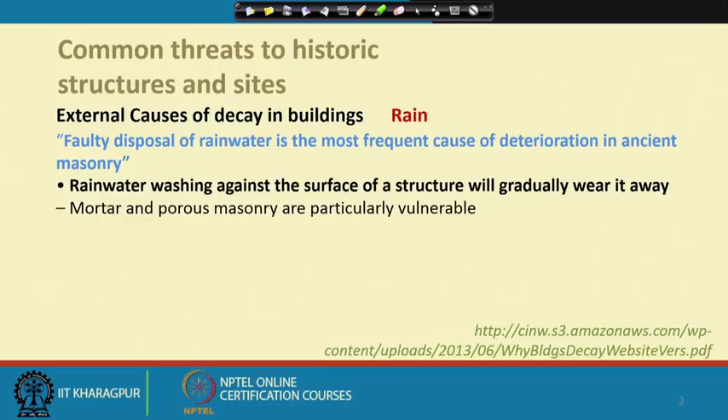If you remember, we said the faulty disposal of rainwater is the most frequent cause of deterioration. It can wash against surfaces, especially porous building materials like brick and certain kinds of stone, and that is a problem. Rainwater penetration into individual materials of the structure causes more damage. I mentioned salt crystallization, continual wetting and drying, and the action of frost and ice.

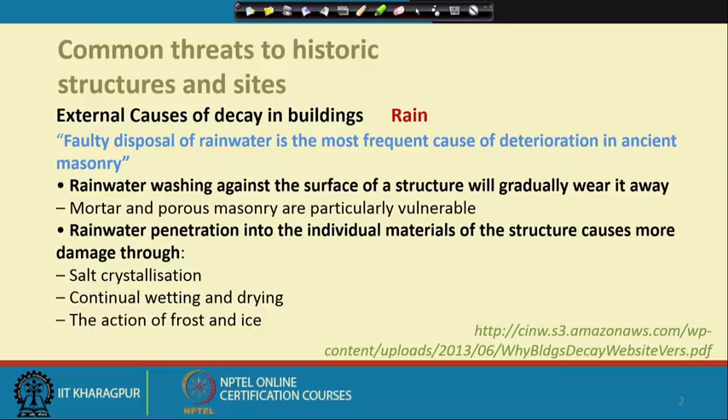We will discuss these three independently to understand what these issues actually are. As I said, it is not only one aspect or factor which causes the problem; there are many other things combined which cause these basic issues.

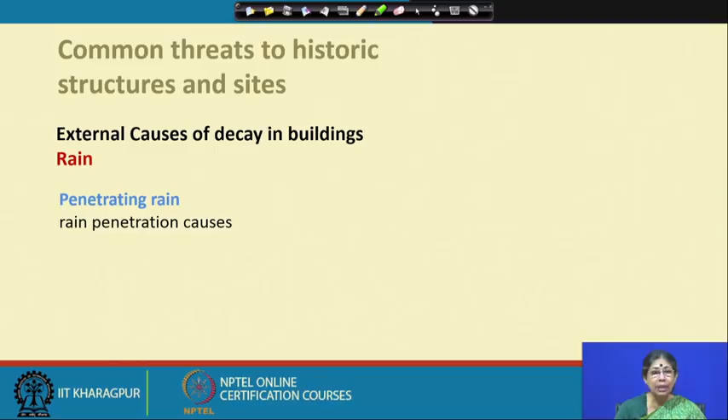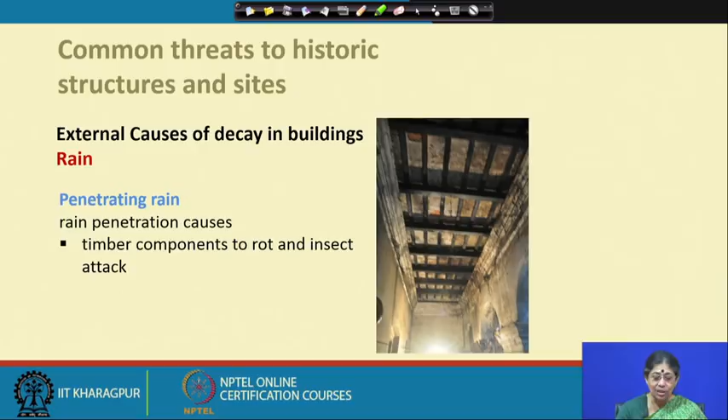Now let us see the external causes of decay: penetrating rain. Rain penetration causes timber components to rot and attracts insect attack. As you can see, this is again in Narajol, a place where roof damage has happened - the flat tiles, timber posts, beams, and rafters. Because of water penetration through the roof, these timber elements are not only rotting but this also creates a very good environment for different types of insects to attack.

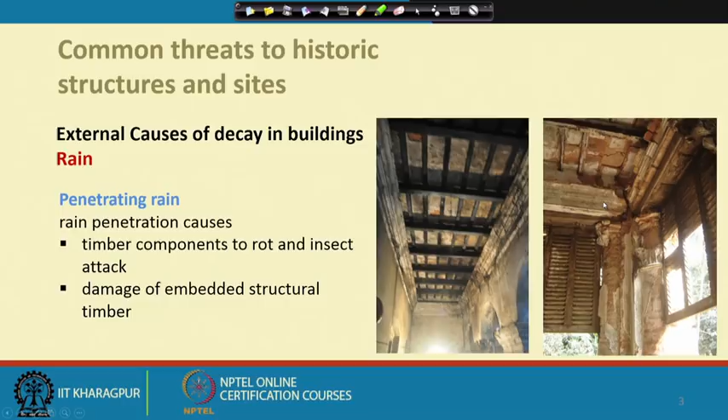This is also Narajol, one of the roofs there. You can see what type of damage has been happening - the timber beams and other elements show major problems, because where the timber beams are resting within the masonry, these places get affected due to water penetration and the rotting of timber, which ultimately causes a structural problem to the entire structure, and the roof may collapse due to damage of the embedded structural timber. These things happen one after another, as subsequent events, and if not taken care of from the beginning, it can become very severe.

The external cause is rain and moisture - rain, humidity, and other factors cause damage not only to structural elements but also to the interior.

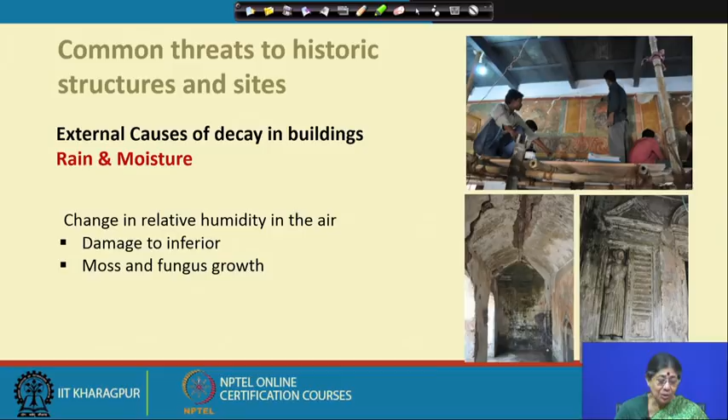So these are some of the issues which happen due to accumulating rain or rising humidity. The other problem, related especially to cool climates, is the action of frost, snow and ice. As you know, in many places this causes severe damage. Even though India is a vast country, there are areas with a very high degree of snow accumulation.

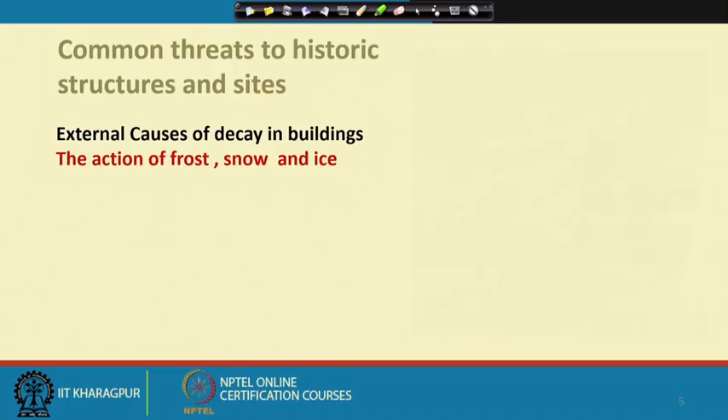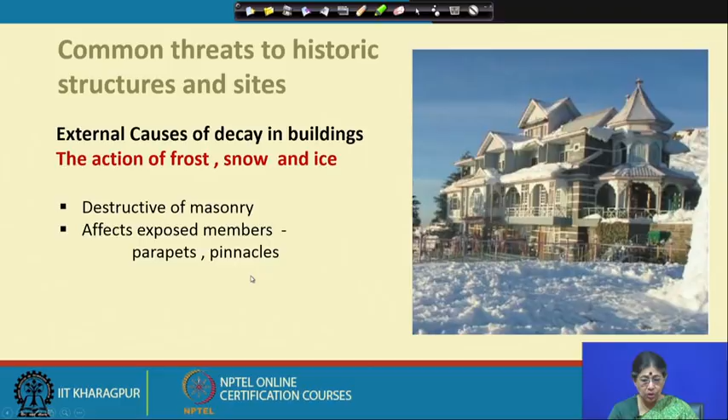It also affects the members of the parapet and pinnacles. As you can see, all of these are a problem. The heavy sheets of snow can cause a problem, and there is a possibility of the roof structure collapsing under heavy load. This is in addition to water seepage and other issues, like moisture penetration.

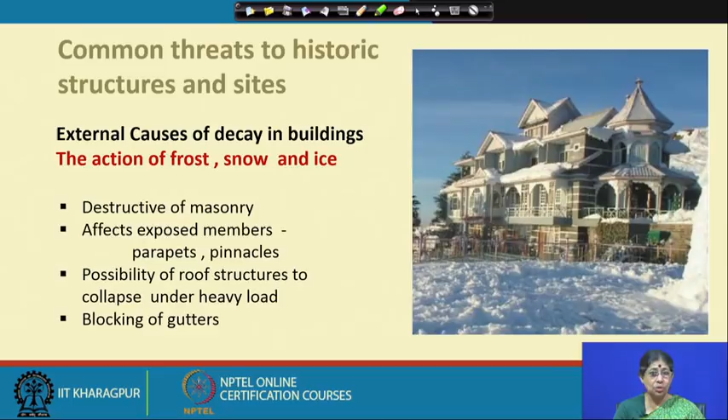And of course, the flow of the water: all the gutters and pipes can get blocked due to the snow and the drop in temperature. This has to be taken care of there. The blocking of the gutters is a very severe thing. So, depending on the climate, the likelihood of some things happening, and the material, one has to understand what the likely causes of decay are in a particular scenario.

Now, I also mentioned salt crystallization. Then there is groundwater. Groundwater problems can happen because of the accumulation of water or a high groundwater level, and the groundwater may contain salt; either the salt comes with the groundwater or the salt may be in the building. Some bricks, because of their material, can have a high accumulation of salt. So, salt crystallization is one of the major problems of

porous building materials. You can see this is North Bengal, where salt crystallization has happened, and you can clearly see the marks where the salt is coming out, and here you can see the spalling of the plaster because of rising dampness along with salt crystallization. Salt crystallization can happen due to changes in the groundwater level, rising damp by capillary action, and damage from dissolved salts and evaporation of the groundwater.

So, what should one do about this? Generally, one is to stop the groundwater ingress, especially since the pores in porous building material act as capillaries and suck up the water, and along with it the salt. In the subsequent dry season, when the fabric dries up, the dissolved salts come out and accumulate on the surface.

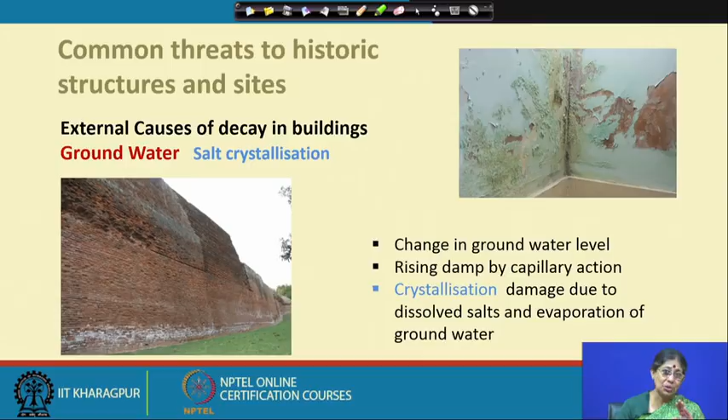And of course, if a lot of this is coming out very regularly, then inserting a damp proof course and other measures are there, but never cover the surface with paint or some material which does not allow the water within the fabric to come out. This is absolutely important to remember.

Now, let us see what is happening. For example, there are places with days of heavy rainfall followed by a drying period. So there is a cycle of drying and wetting, and in a porous material the water tries to fill up the pores, and with the water there can be dissolved salt, which may come with the water or may be within the material.

Now, as we can see, when the water comes there, it will be followed by a drying period when the water tries to recede away, but these salt particles try to crystallize. With this repeated cycling of the wetting and the drying period, we have to see why maintaining the movement of the water through the pores is so important.

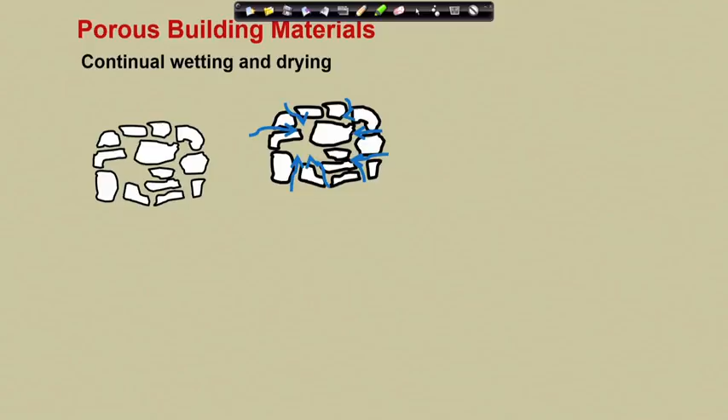For example, in this case there are pores. Depending on what material it is, there can be small pores, there can be large pores, there can be a combination of large pores and small pores. So when there is rain, the wetting period, the water is coming through the pores, and as you know, due to capillary action, the smaller the diameter of the pore, the higher the water can go. In the larger pores, the ingress is much slower.

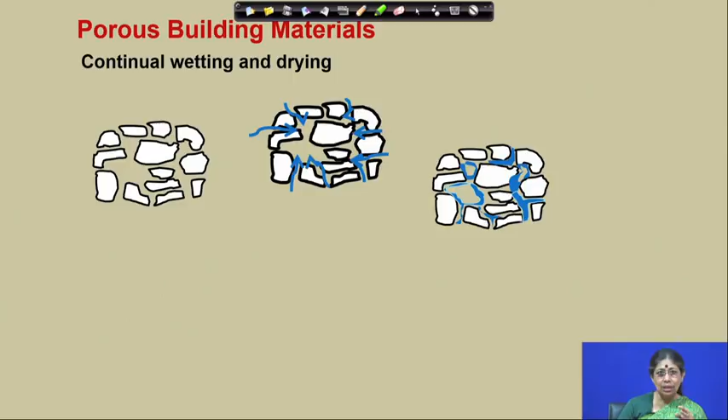So in the wetting period the water comes and tries to fill up the smaller pores and the larger pores. That is what is happening here. That is the wetting period, and it generally fills up all the pores if the rain continues for a longer time. Then this wetting period will be followed by a drying period when for a few days there won't be any rain.

So the water is there, and what we see here is the salt which is dissolved, either as a part of the material or in the water. These dissolved salts try to crystallize and fill up the pores. Now, in the drying period, the water recedes from the pores, and these crystals remain within the pores. They tend to come out along with the water and get deposited on the surface, and those are the white salt-like things you have seen on the surface of the wall.

And that is not bad, because although it causes some problem to the fabric, it can still be washed, it can be cleaned, and if it does not remain within the fabric, then it is not much of a problem. That is why allowing the water to come out is absolutely important.

Now, in a case where these crystals become so big that they block the narrow pores and do not allow the water accumulated inside to come out, it causes a pressure on the internal material, a thrust happens, and that causes cracking of the building, if the crystals are not allowed to come out.

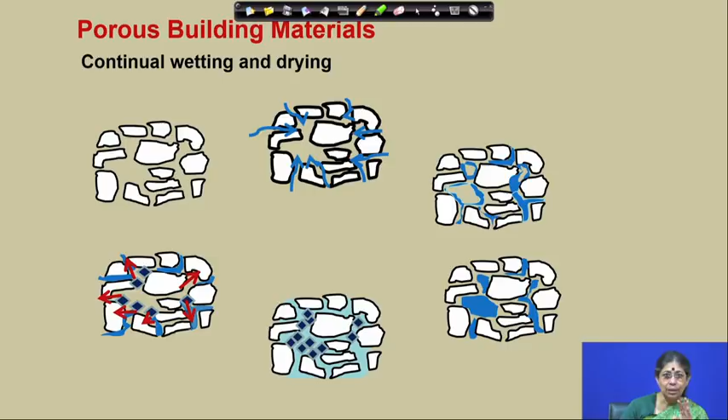So these are some of the things regarding this continual wetting and drying, especially where there are heavy rains for a few continuous days followed by a drying period. If there is salt in the material or dissolved salt in the water, then these types of problems happen. This is what is called salt crystallization damage.

Now, the salt dissolved in the water, or salt content in the porous building material, if combined with wind, can cause some other severe problems. We will see that, but now we are coming to the next natural cause, which is the wind.

Now, I will come to the water and moisture problem later on, but wind as such can exert a strong directional force. The exposed sides of the building can therefore be subjected to a pushing action, while the protected lee side can experience suction. So there is a difference between the protected side, the leeward side, and the windward side, and these can behave differently.

Same like the sun: the side which is more exposed to the sun, which is heating up and cooling down very drastically, will have a different type of problem, whereas the other side of the building, or the fabric which is cooling down very slowly, probably will not have that. So, one has to also understand this phenomenon.

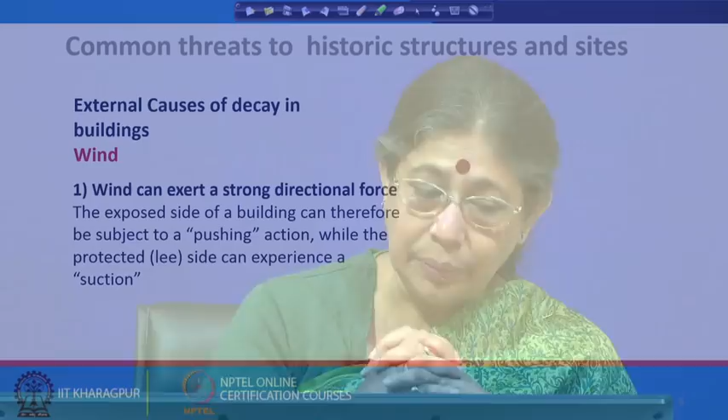So, wind creates a problem, especially for tower spires and bell towers, which can move in high winds. A very good example is Norwich Cathedral in England, where a 99 meter spire has been found to move to and fro almost 3 inches, or 75 millimeters, in a high wind.

It was actually moving. And it is a very important case because at one time the movement and the deterioration of the spire stone was such that the authority decided to tear down the spire. Sir Bernard Feilden, whom I have been referring to a lot, was appointed as the architect of that conservation project.

There is a lot of writing, and he has also spoken on various occasions, that when he went up he could feel the spire moving. But rather than tearing it down, he talked to the structural engineers and others and decided to put in a stainless steel wire, in addition to consolidation and replacement of some of the damaged stones, and because of that the original spire is still there.

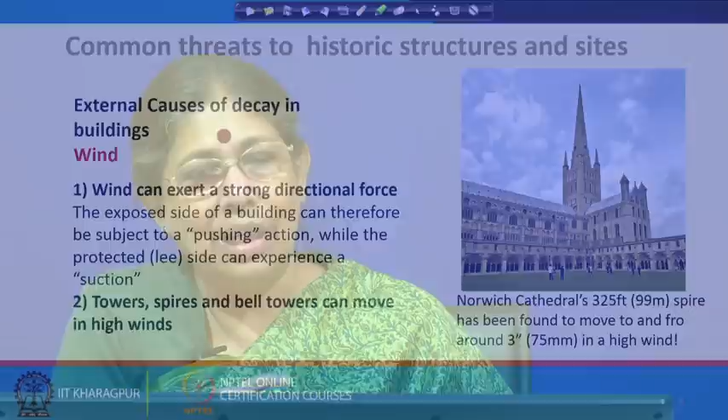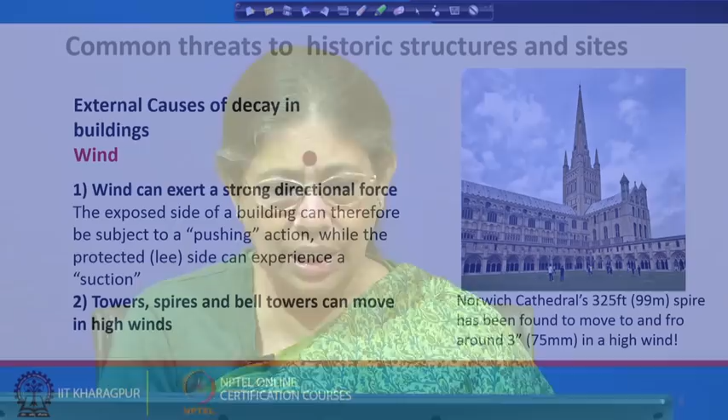It is moving, but the moving is not bad; it gives strength even with the movement. So, one has to understand that high structures or high parts or components of a structure can cause a problem, and it is not always necessary to demolish them; there are ways to find. This is a very important case where the problem of the spire happened due to the wind load.

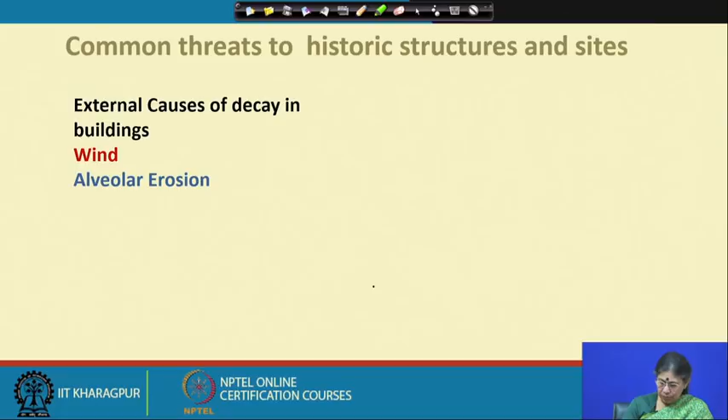Let us say it is a porous building material, and these are the bricks, and I am exaggerating this part. Between the bricks there are joints, and within the brick there will also be fine capillaries through which the water is likely to come out.

Now, if there is salt within the water, the salt will come out on the surface, and then, as we say, the crystals, which I am of course showing out of scale, will deposit and they can be washed away.

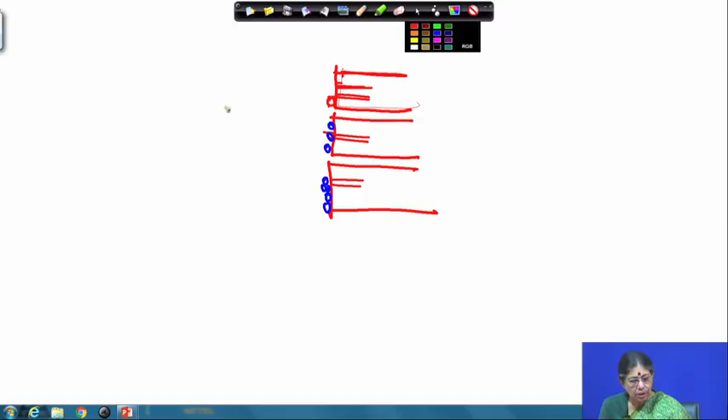But when there is a very high wind coming and hitting the surface, which happens in Mahabalipuram, then before this salt can come out of the surface, while it remains within the surface, it gets dried up, the water is sucked out because of such a high wind speed. So the water cannot come out, and it is getting dried up very quickly, at a very high rate.

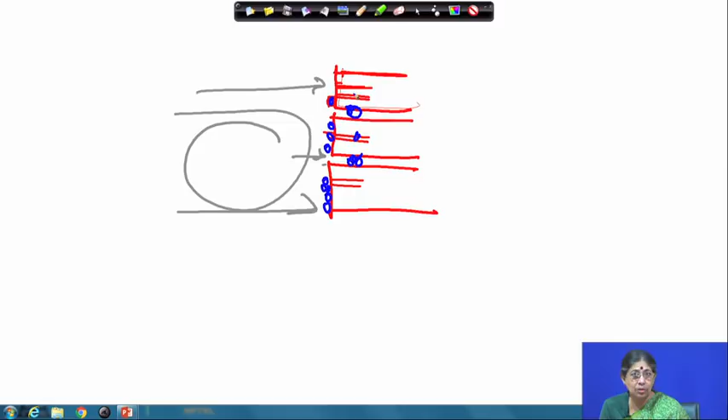So, the crystals remain within the material, within the pores or the joints of the material. At a certain time, the surface separates and falls off. It is not actually to scale, but if you see the pock mark, this is what happens.

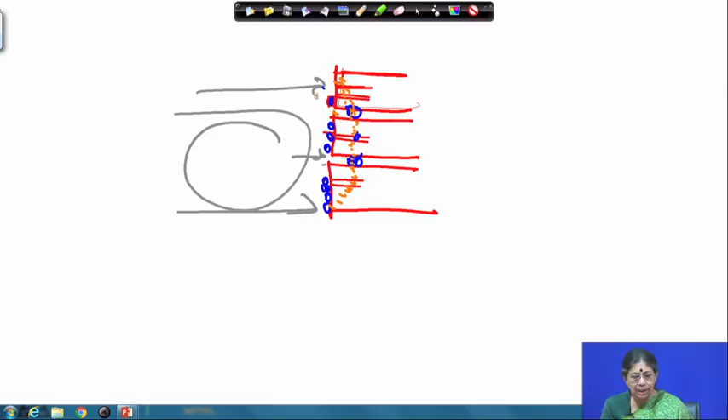So, this falls off, and there is a local hole, and when this local hole happens, a local eddy current forms, which is much faster.

And when this local eddy current forms, it again does not allow the further water to come out, and they will deposit further inside of the surfaces. So what happens in that case is that the next layer of the surface will get damaged, and this progresses,

and because of that local eddy current and a very high speed, gradually we see holes developed in the surfaces. So, this is called alveolar erosion. Alveolation means holes, and erosion. This is quite dangerous, because as you have seen, these types of holes and pockmarks over the whole surface happen because the salt remains within the fabric. So, this is a problem.

And now, the question is how you take care of that. The idea is that you have to see that the speed of the wind becomes less. So, you have to give a curtain. What is that curtain? In case of Mahabalipuram and many other cases, a barrier is formed. In this case, casuarina trees are planted, so that the speed of the wind which is coming is reduced.

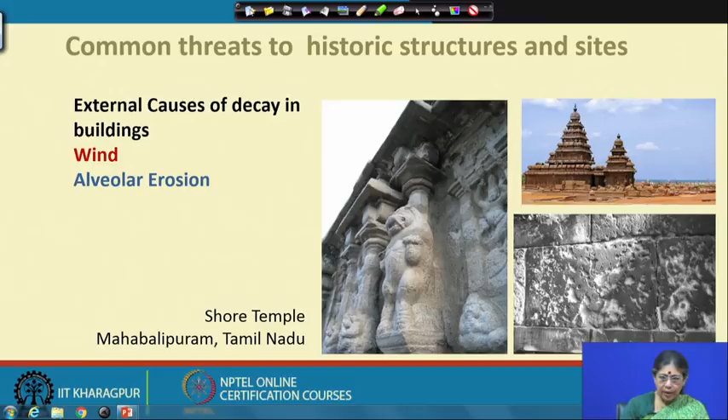And then of course, along with that, the insertion of damp proof courses, reducing the salt, draining away the salt from the structure, all these are very important. So, this is what I said, the salt crystallization damage and the alveolar erosion. As I say, the alveolar erosion is much more dangerous. It affects the material much more, and this can't be rectified unless you change the stones. And the next one is the biological and botanical causes.

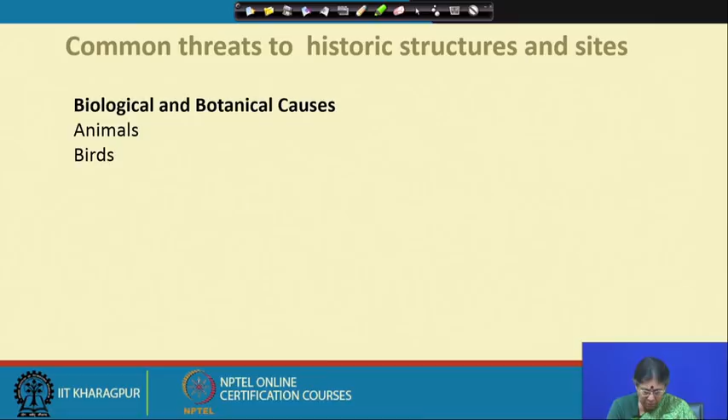As we have seen in some of the cases, in a high rainfall area different things are important. So, in the biological and botanical causes, which is our next aspect, different types of animals and the problems associated with them also cause a lot of problems. The birds, the bats in the historical structure, and of course, we can't stop them. We have to see how to reduce the damage or how to stop them, because there are also societies which are very concerned about animal protection. So, we have to find a balance. And we will see what type of damage happens.

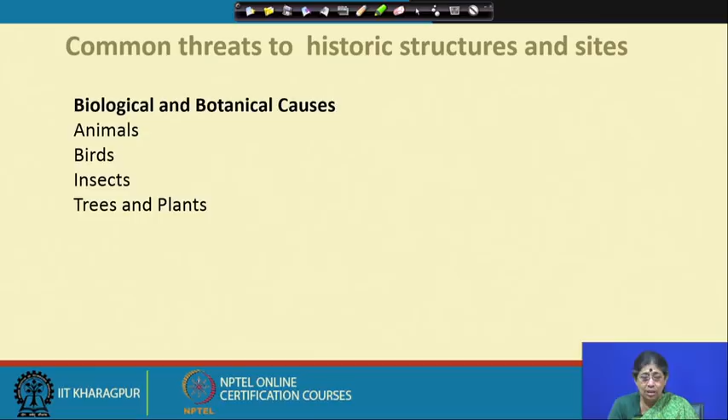The insects, different types of insects depending on a particular weather condition or a particular type of material, these are also problem areas. The trees and the plants, if not taken care of at a very initial stage, can be very disastrous for a historical structure. The fungi, different types of fungi and different types of mold. There are thousands of species of molds and lichen, each with its own habitat and environment which they like, their different food habits; they survive on different types of built environment.

So, that is why we need people who specialize, who know the behavior of different types of molds and lichen. Unless we have a clear understanding of that, we can't really investigate or take precautionary measures. The different types of algae and moss, there are so many species, and it is very important to understand the reasons for their decay and other things.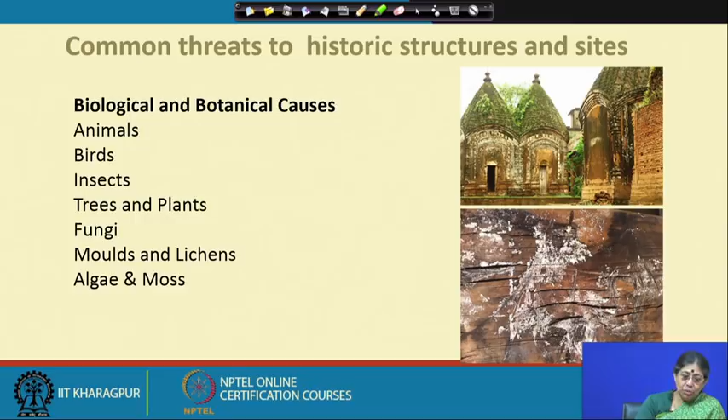Again, while cleaning that, one has to be very careful, because it should not affect the material in a negative way when cleaned. So, this is a holistic approach one should take. So, we will take those aspects into our next lecture, where we will talk in detail about the various biological and botanical causes, and broadly what type of damage and decay they cause to our historical structures.